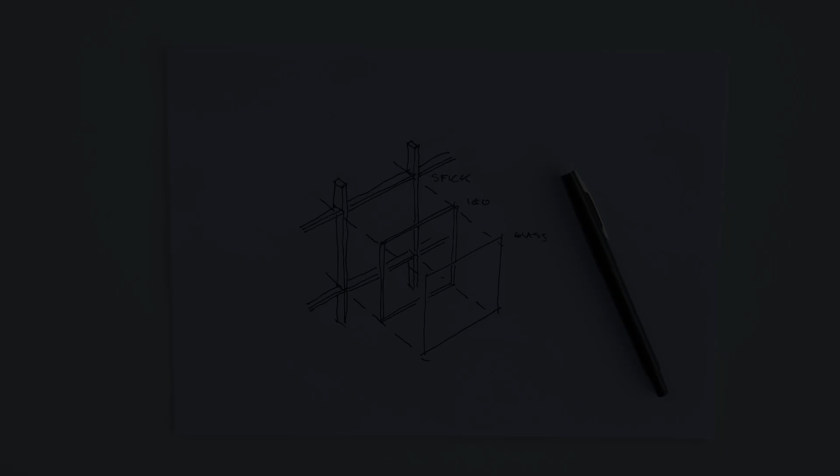Erwin, thanks for meeting. Right, as a facade designer, I did now engineer it from my side, but you're a structural designer. So as a structural designer, you have to evaluate what I did. You need to address where I did wrong and where I need to take care. And with that, I'm going to then redesign.

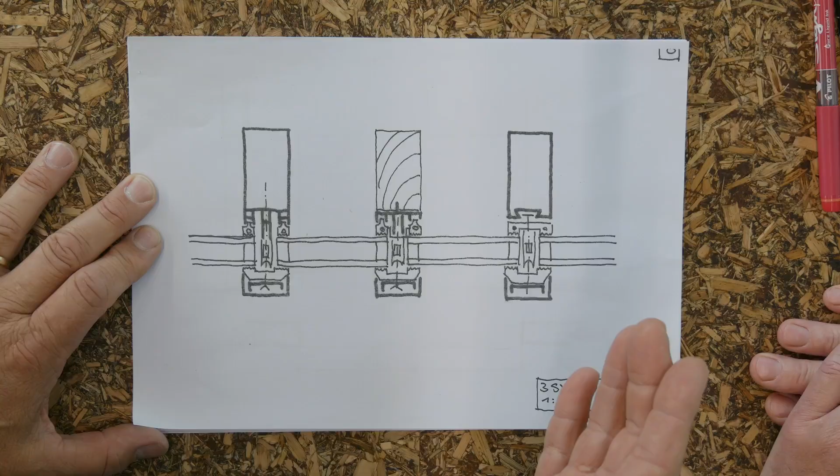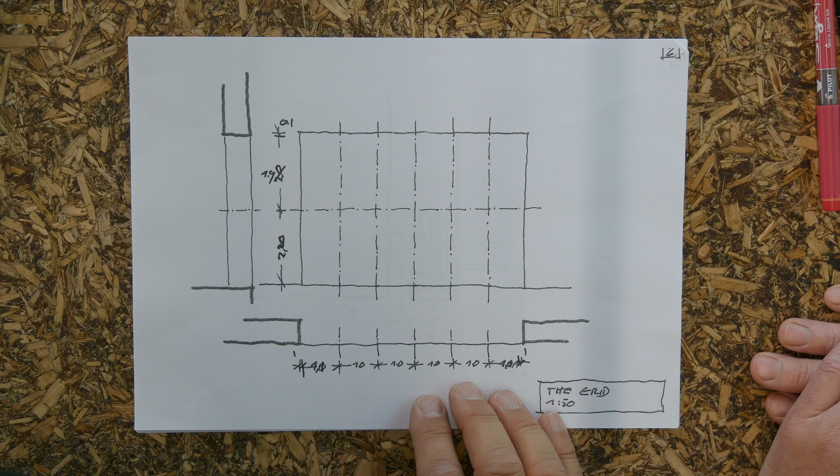The system: we made a selection of aluminium system, a wood system, a steel system, and we decided for the aluminium system. And this is the request. It's a rather simple problem. We have concrete walls, so it's good to fix. We have an opening of 620 by 420, so this is not too complex. This is the grid which was decided. We made it 220 because we want a door in here. And then, a meter something for the horizontal grid.

And then we made a decision about the system, aluminium, as said. And we need to think about the tolerances. So this is where concrete is supposed to be, somewhere in this range. And then the facade system is with a certain distance. We decided 2.5 centimeter, that's the distance from the main grid to the system. Is this kind of tolerance decision okay? Would you expect more tolerance in concrete? No, the tolerance is okay.

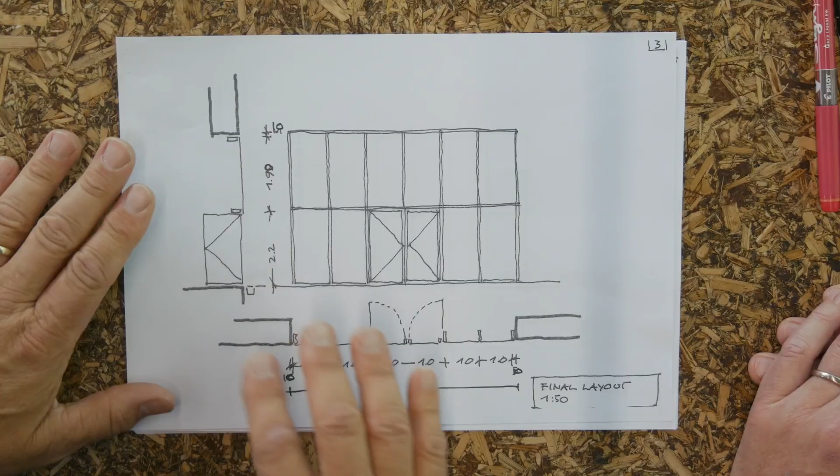I think we should have a look at how we connect or keep this mullion free from the concrete. Yeah, so expecting this is the distance, even if concrete goes very much inwards, it still has a distance. Yes. So in that respect, this is kind of okay from your side, which is good. Happy to hear. Makes less details to change for me. This is the overall final layout. So we ended up with this grid system, with this horizontal line at 220 for the door. We're going to see the door later. And now the detail.

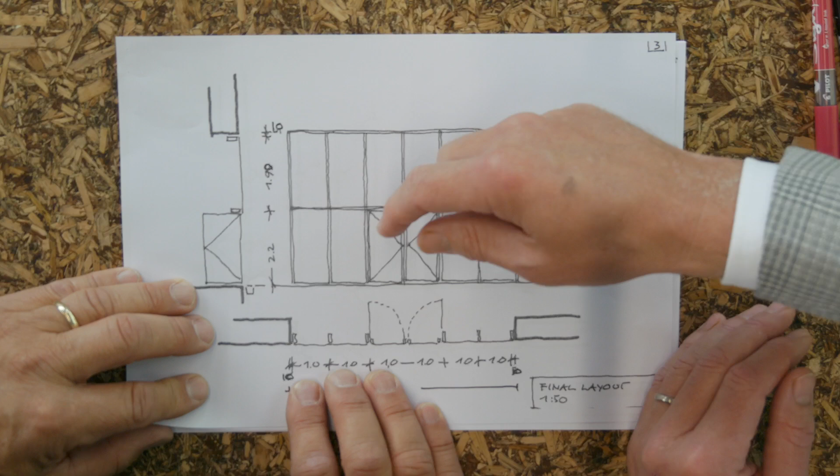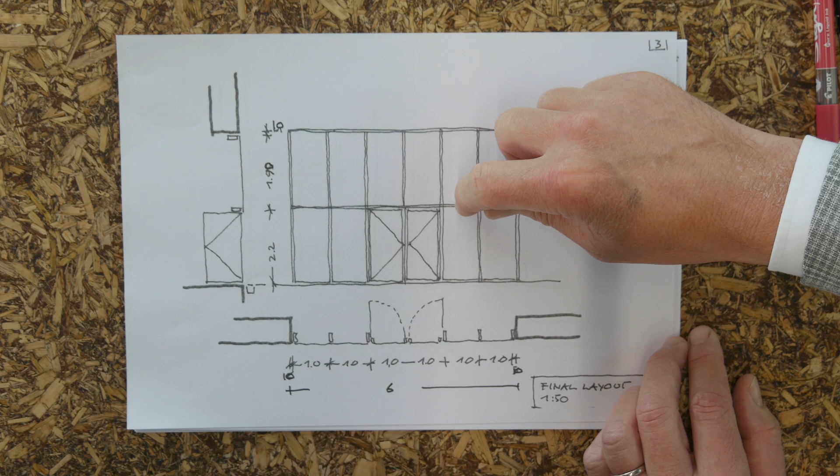These are operable doors, not sliding doors. Not sliding doors. Okay. What would you do with a sliding door? Well, that's depending on how you would organize the whole system. If you have sliding doors, maybe you could have a more heavy transom and less mullions to make sliding happen. Which means a heavier transom, taking the dead loads from the top. Yes, correct. And then allowing not having mullions here and here at these places. Correct. So that this door could horizontally slide. Yeah, and maybe you could even hang the transom to the roof. But you have operable doors, so you don't need it here. But it's always to keep in mind.

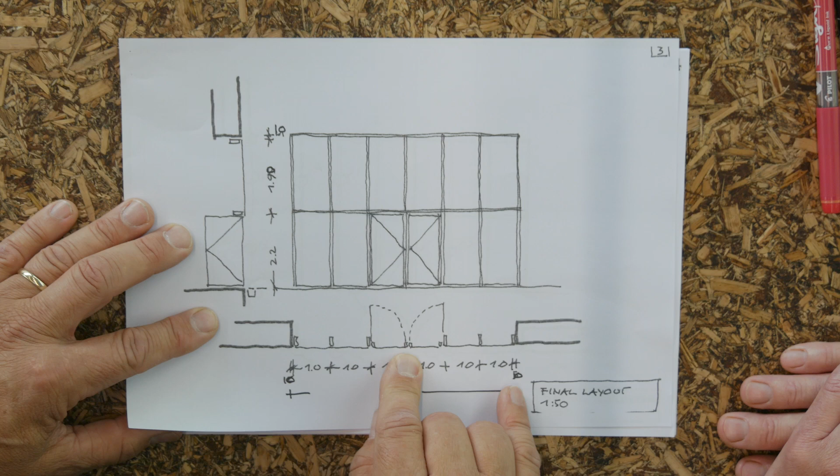I fancy this engineer because you're giving me opportunities to redesign. Very nicely done. We keep it simple. We keep normal openable doors with a normal stick system, mullions and transoms as they are designed. So in the setting, the inner one is having less, which means that the horizontal loads of this one are going to this one as well. So we need to take at least care of that load situation. I think you made a detail of that one, I hope. Yeah, you're going to see later. Okay, right.

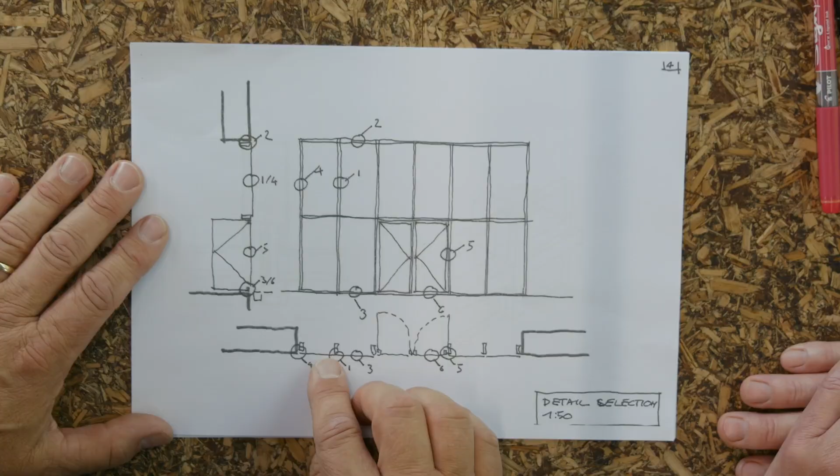So then we made a decision about the details. We decided to do the standard detail, bottom, top, side, and the door with some details. Of course, you can do a lot more of these details. Are you okay with that? I'm okay with this one, yes. As structural engineers, you always think about the mullions and transoms. So in a way, you would like to see how these two connect. Maybe we can sketch something later there. Yeah, let's see. Here we go.

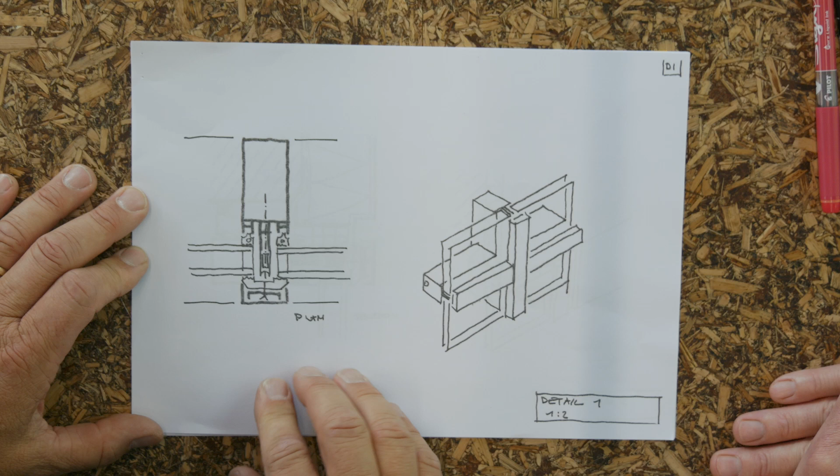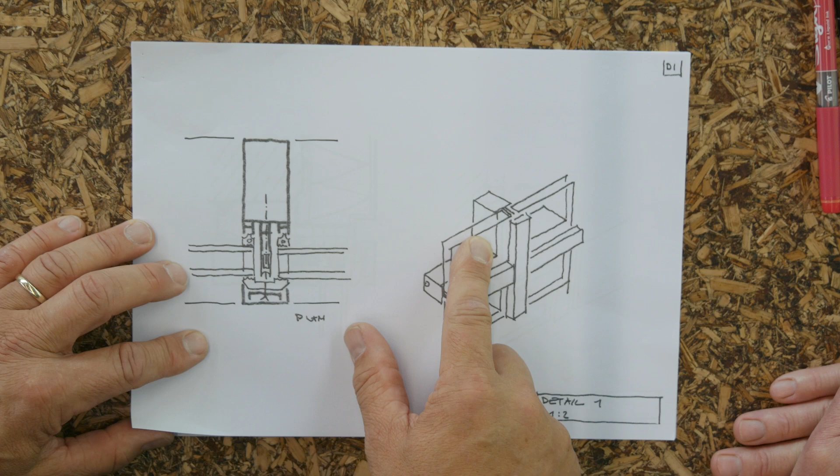This is the connection. What we did is we took it from the catalog, a typical work which you do in this situation. You start with a standard detail, the aluminium stick system, horizontal cut, and then the connection comes out of their system. So if I go for the aluminium system, they have a certain connection point, which then takes a certain quantity of loads. If I come from the timber, again. If I come from the stainless steel, again as well. And then I have to believe that somehow this load transfer can deal with the loads I'm giving to this. Do you agree? And do I have to take care of something?

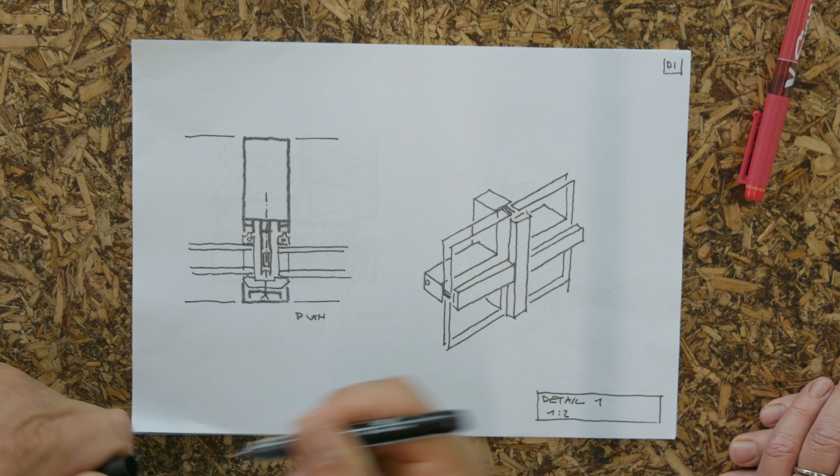Mullions are there for two reasons. The one is taking the vertical load of the whole system, and the other one is the horizontal load, which comes from wind. Yes. So it has to be strong enough and stiff enough to hold those forces. So the dimension of this needs to come from the catalog, I guess.

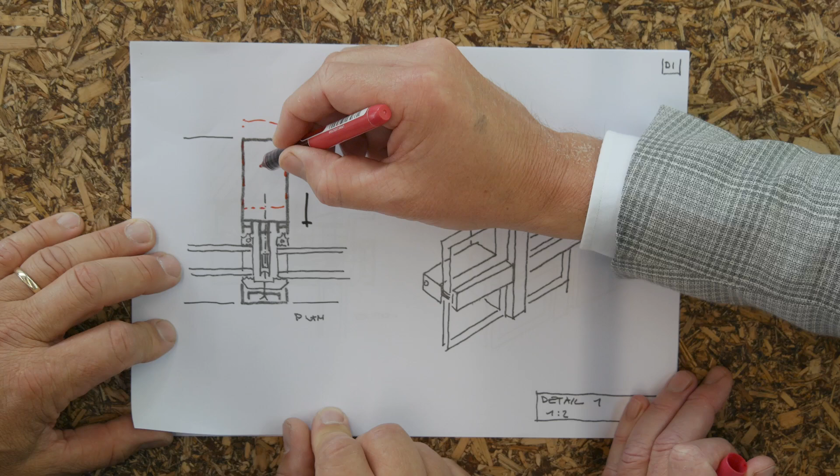Yes, because it can deform. By wind, it might deform in this way. Yeah. And if it goes too far, you feel uncomfortable, unsafe. Yeah. So it should be stiff. And the other one is you have vertical load. So there's a vertical load coming down. Which means this way. Yes.

And this way. Correct. And first of all, the vertical load only comes from the weight of the glass and the system itself. So how does the load of the glass find its way into the transom and mullion? That's a good question. Maybe we can go back to one of the previous. Yes, I think I like this one.

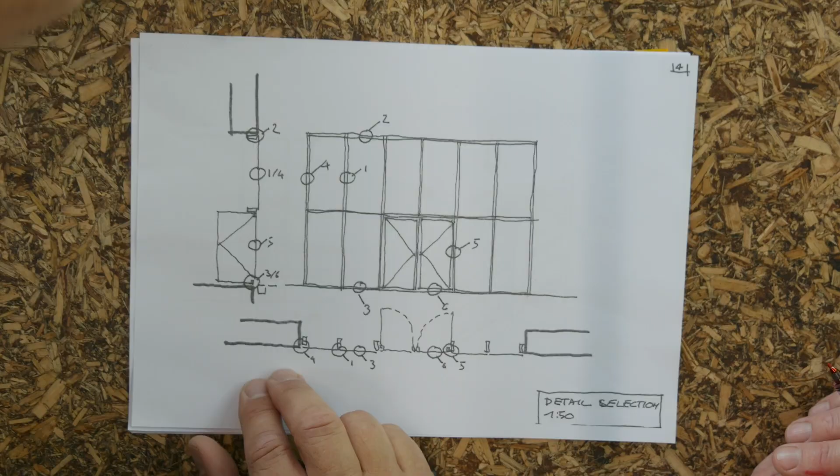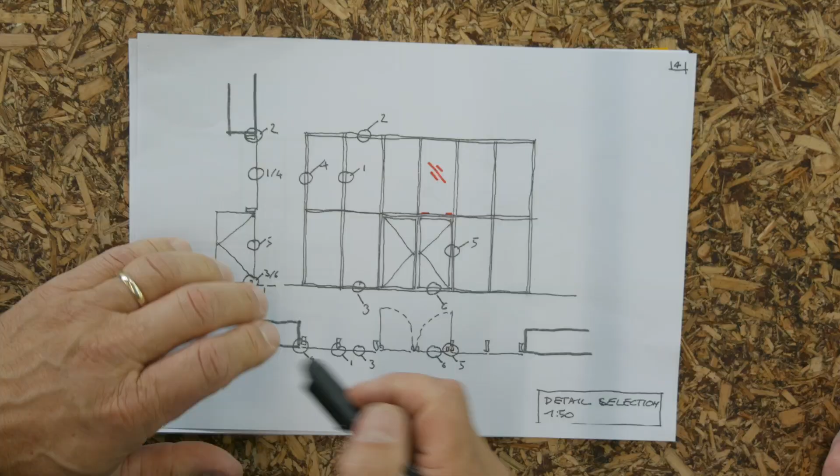Okay, go on. If you would have, let's say, this panel here, it's a glass panel, and what we usually do is to have two plastic blocks, approximately 10 centimeters from the vertical edges. There it rests on the transoms. I see. And then the transoms transfer it to the mullions. So the load path, the first one is, it's going to rest on the transom, and from there on, it goes further and it will rest on the mullions. That is how a vertical load of a glass panel goes down to the foundation.

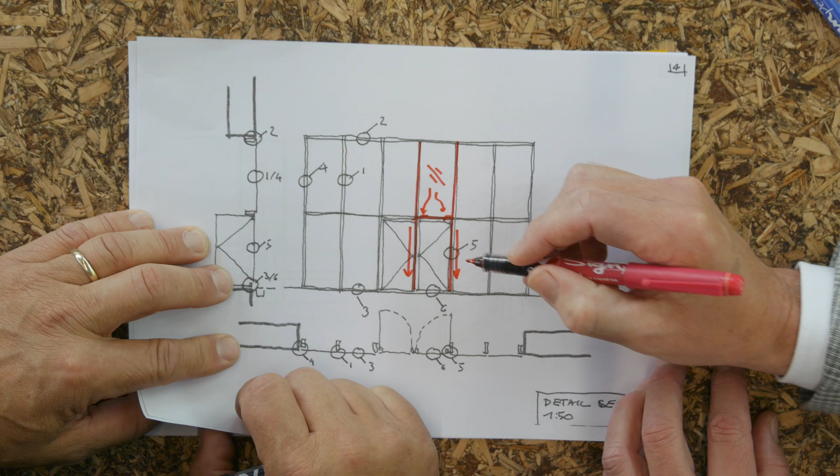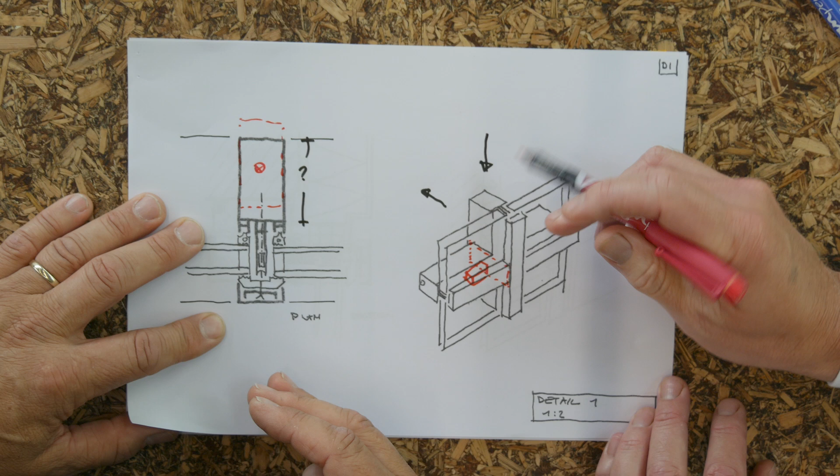Great. Which means in this detail, we somehow have to have something here. Yes, you have to get some plastic blocks there, which we're going to see in the vertical section in a minute. And of course make a good connection where this transom connects to this vertical mullion. So those are two very important structural points. Go down here, then they're transported sideways, and then they go down.

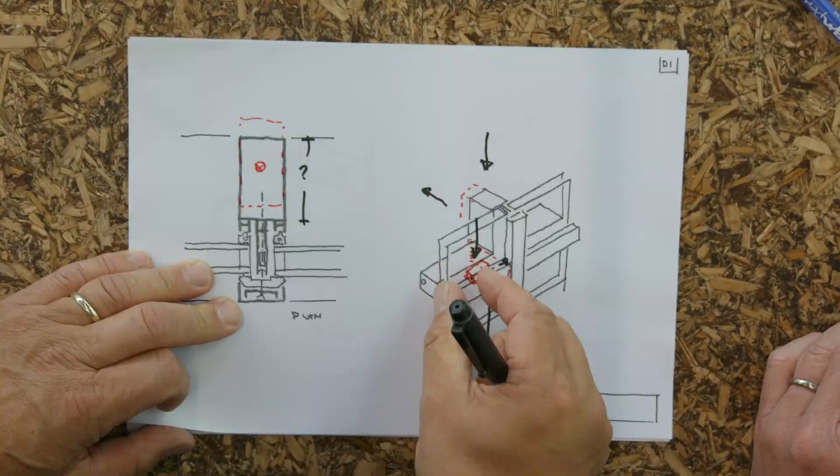Correct. That's the vertical one, and additionally, you also have to see, if you have this horizontal load, that it doesn't deform too much. Yeah. And I think we'll get there when we have the detail of the tolerances where we hit the concrete wall. And again, I'm going to take this as a given system, so I'm going to check the system provider's information to see how wide I can go with what kind of dimension and how deep I need to go for what kind of dimension of this.

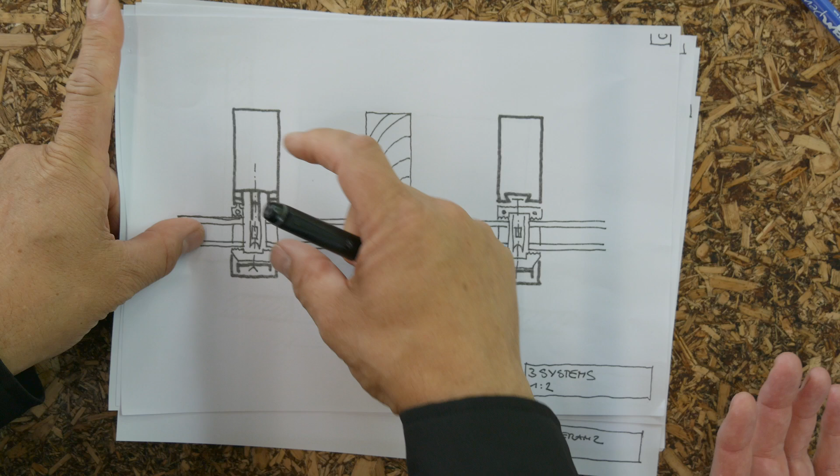Yes, and we see here the aluminum system, and of course you also have wood and steel, and it has to do with elasticity. So the different materials have different elasticities, which gives different dimensions. Bluntly speaking, the aluminium one is a lot wider because it's weaker as material versus the steel system. It's a factor of 3 in stiffness. Or the other way, I can go higher with a steel system with the same dimension. Yes. As I say, principal rule of thumb.

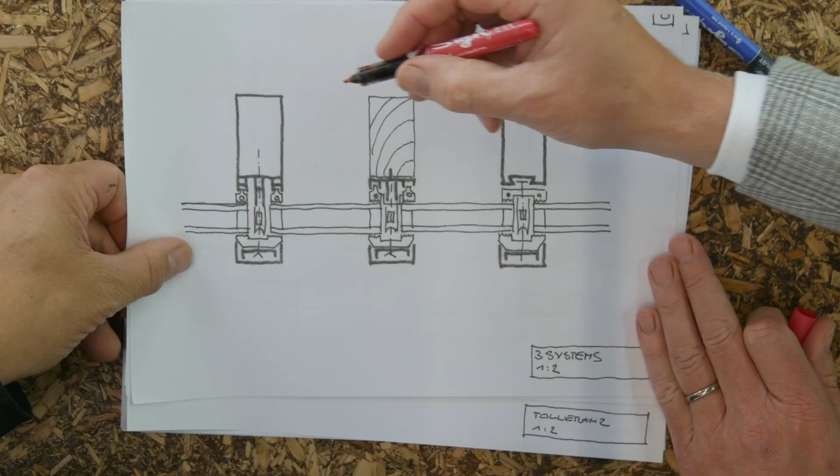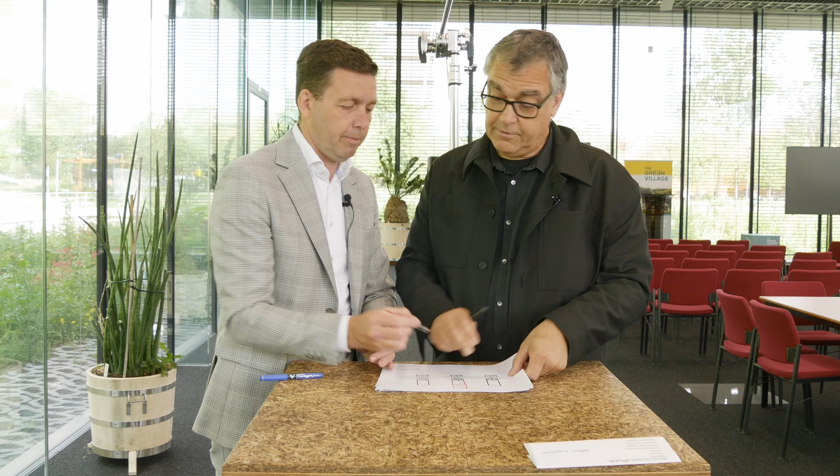So if you would simplify, you would expect that this one has the least dimension. This one will be slightly larger, and a wooden one would you expect to be larger? That's my first expectation. For the same height for the structure. Okay, that's a good one. So going back to this one. This is the main detail.

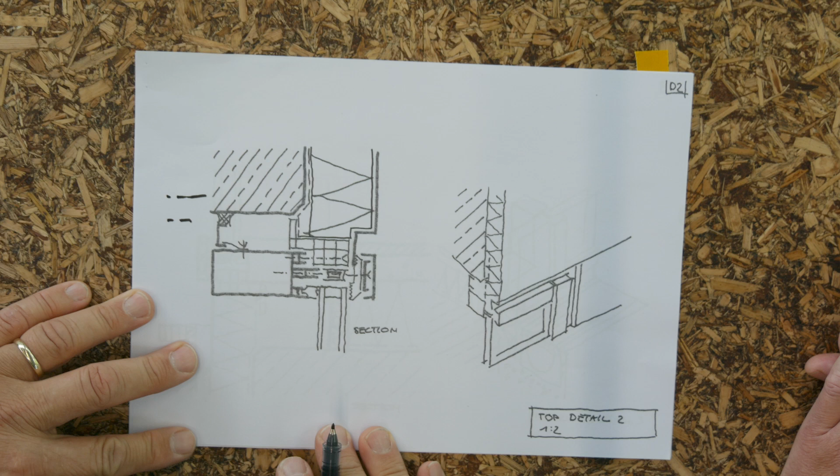This is now a connection to the top. And here we again talk about the tolerances. We had this integrated, so we said this is 1 centimeter, 1 centimeter, where the concrete could find its position. In the final situation, we still deal with the same aluminium piece. And we need to get this airtight, watertight to the outside as a normal facade system. Any aspects from structural design which we have to take care of?

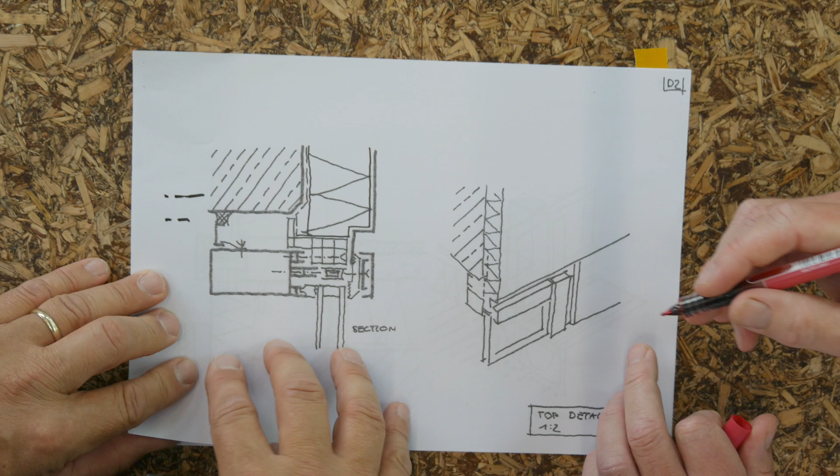Yes, I will ask you a question. How much vertical weight is here at this top from this facade system? From the system, there's no weight. Yes. So what do we have to solve then? Do I have to solve something in this direction? No. Do I have to solve something in this direction? Yes, correct. Here you only have horizontal wind load.

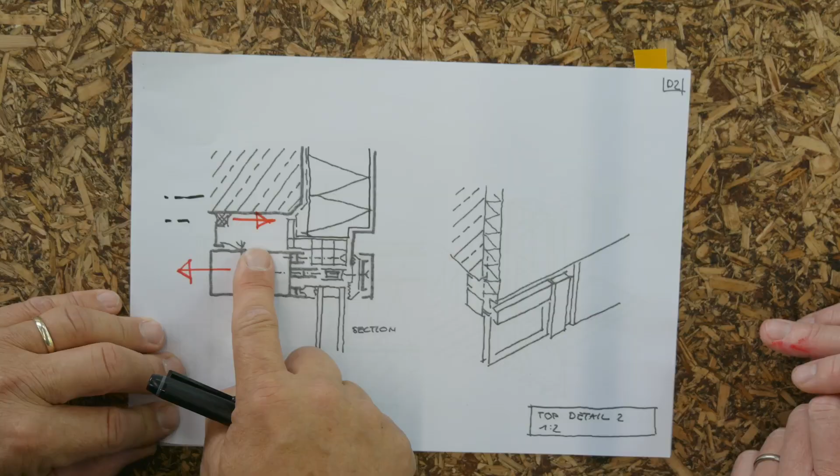And of course, the system itself weighs a bit, but that's not a big issue. So here you have to solve the horizontal force, and you have to connect that to this counterpart, which is the concrete. Yes. Okay, these two have to be connected. Yes. Again, the catalog will supply me systems, so there's some kind of connection detail which is to be integrated here. And if I would finish this detail, you could also draw the mullions here.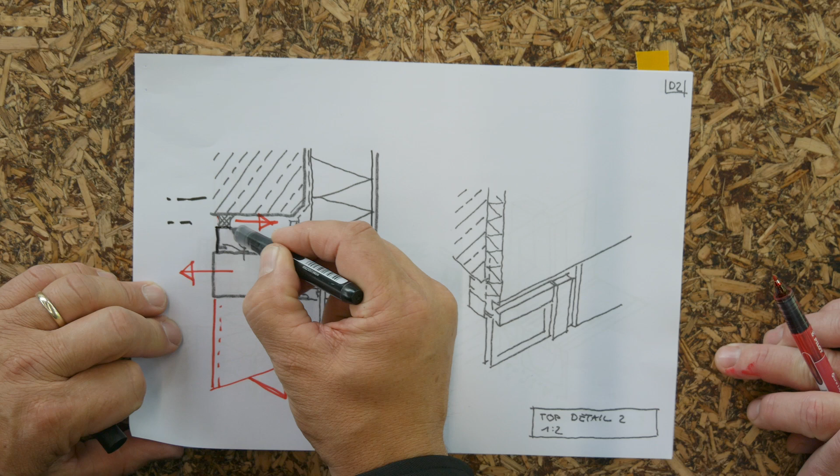So there are always mullions. So you could also maybe connect the mullions a bit further here. So it's a good idea to connect. So it may end up in, say, the mullion going on this way, and then there's a shoe with a sliding piece inside, for instance, allowing that this movement of the main structure doesn't hit the system itself, but allowing that horizontal forces are taken.

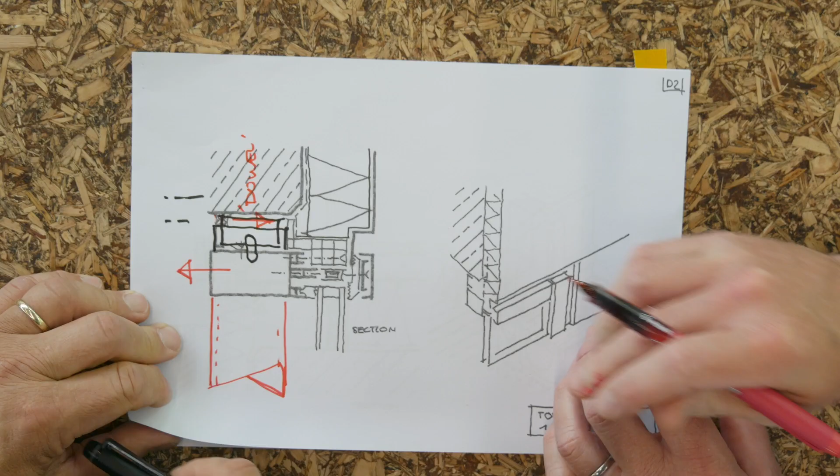It's like a dowel. And then there's maybe some kind of connection in here. Yes. Let's call it a dowel. A dowel. Yeah. Great. Top. Bottom. Yes. When I rephrase your question about the loads, I have the horizontal loads. Correct. And I have the vertical loads. Yes. So somehow these loads need to be taken and these loads need to be taken. Yes. What is your answer?

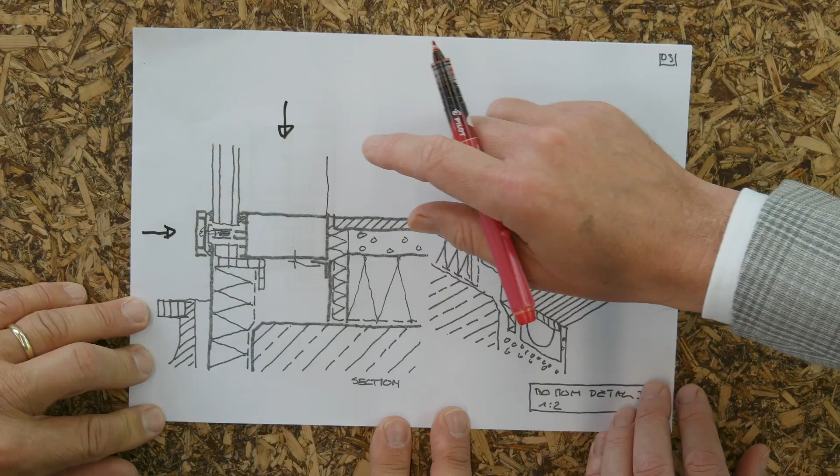My answer is you could do. I always think in options. Do not always give one solution, but try to have more options. One of the options could be if I have again the mullion where all the forces are in. Okay. You might have a support in this area. For instance, a block of insulation which is strong enough to hold the forces. So a solid block of foam taking the whole structure.

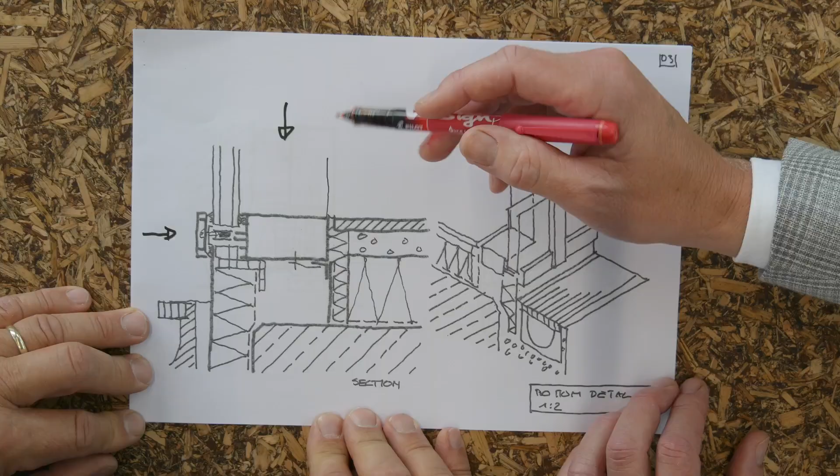Yeah, why not? Okay. No point load problem. Which actually would also fill this part, which then would improve my U value. Yeah, and you have no bugs. And I have no bugs. True. Yes. The other way could be to only support the vertical mullion. For instance, all the loads come down and I might even support it here. So all the forces go down here. And I have a kind of pedestal, a kind of footing,

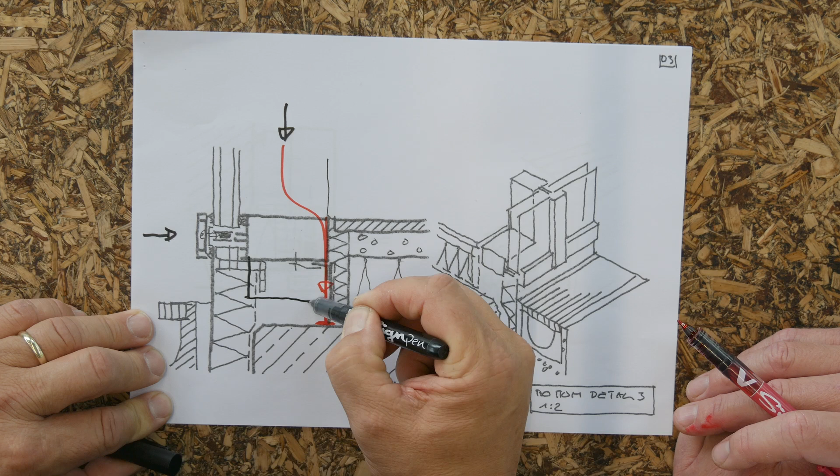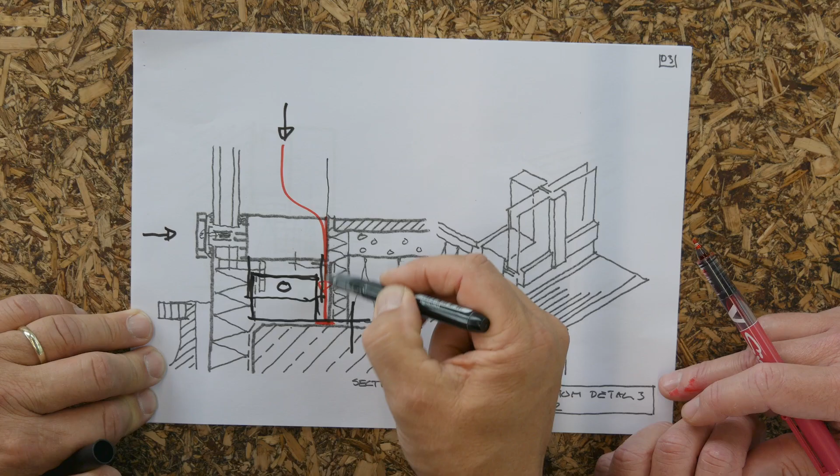where it could rest. Can I do the same as I did at the top, where I have the mullion being longer and then some kind of dowel-like situation which I fix? That is also a good idea. And then I fix it here, and then I have a structure which is fixed to the side. I can actually move it before I fix it. And then I extend the facade system and fix it with a final screw in position.

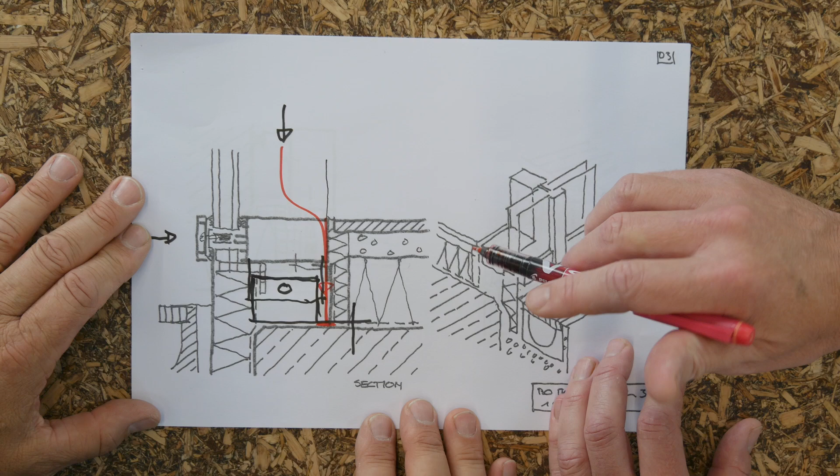Yeah. And then the difference is that this is fixed, so forces down, while this is still allowing that the main structure moves and doesn't give the force to the system. And one way of moving that we didn't address yet is rotation. Since from the horizontal wind load it will try to bend. True. This will give a certain rotation. Well, hopefully not that much. I'm just exaggerating to make it clear.

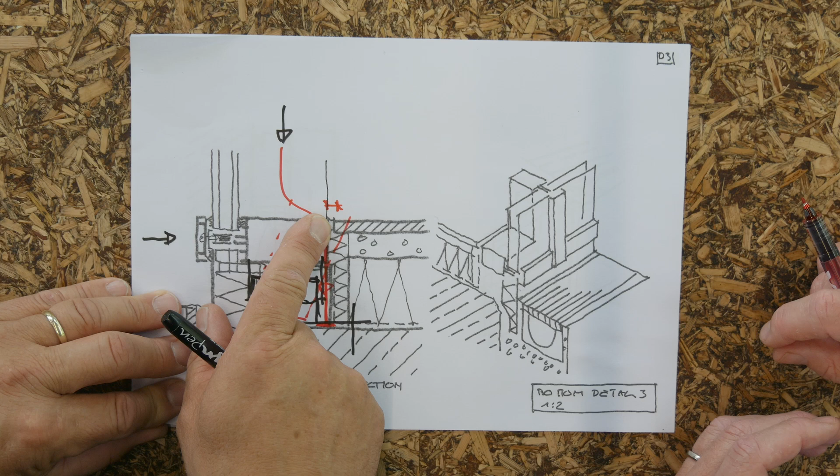Yeah. So at this position, you need a kind of soft material that knows how to. Which I did. That's fair. You did. So it's very important to keep a certain distance there. There's potential for rotation of the mullion. Did you do the same at the top? Of course you did. I already checked that. I saw that. Thank you. Okay. Well done.

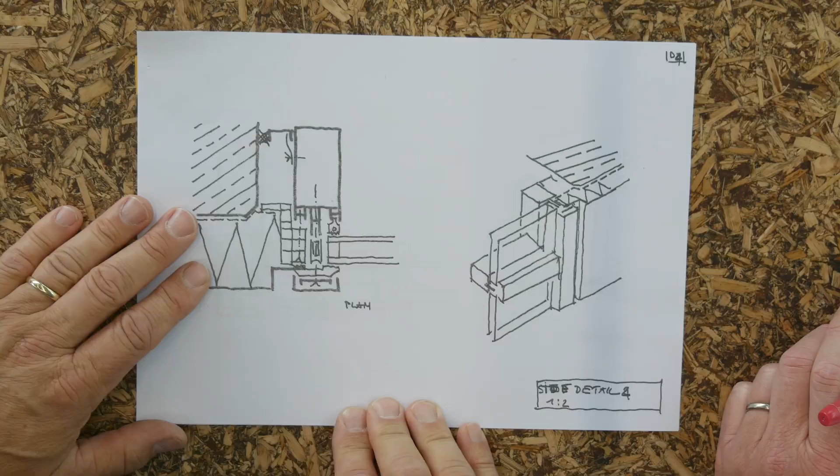Okay, this is done. Now side. Rephrasing your question, what kind of forces? We do have forces here. We don't have forces in this direction. So only this kind of forces. As it is now taken at the top and the bottom, do I need to fix it here? Yes, I would like to. Not from a structural engineering point of view, but more for weather tightness.

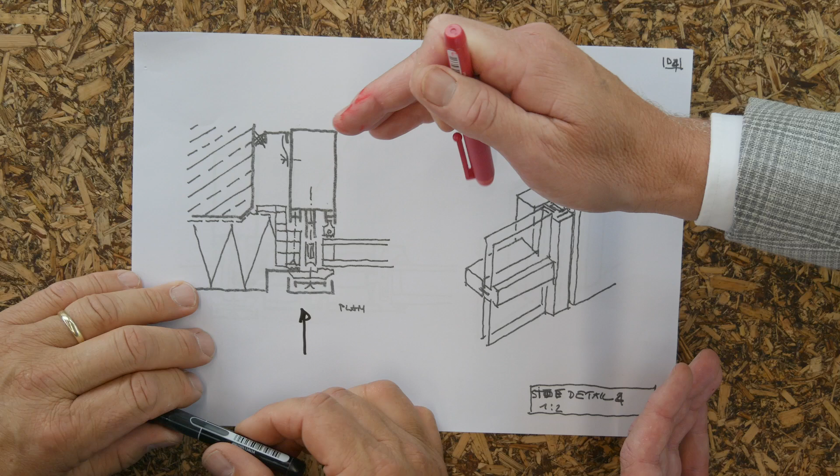I see. If this one starts to move a lot, you can imagine that it's very hard to keep this detail watertight. Okay. And you would also like to keep the dimension the same for each mullion. So to keep that the same, you would have a connection to the concrete here. That's very important. So I'm somehow going to do a connection like this, and I still need to work with tolerances.

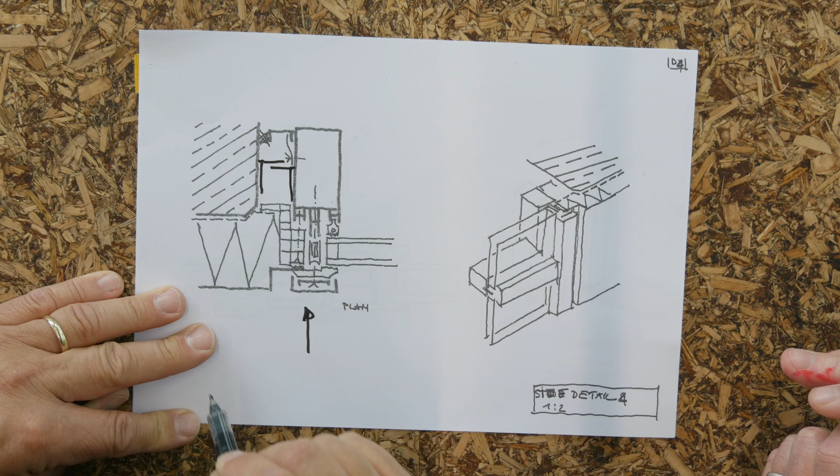Yes. So I allow this to be fixed finally in the end. Yeah, and so you have here, it's slotted like here, so it can move a little, but this one is really fixed here and will be fixed there. Okay. And that way, the horizontal forces that come here can be taken to there.

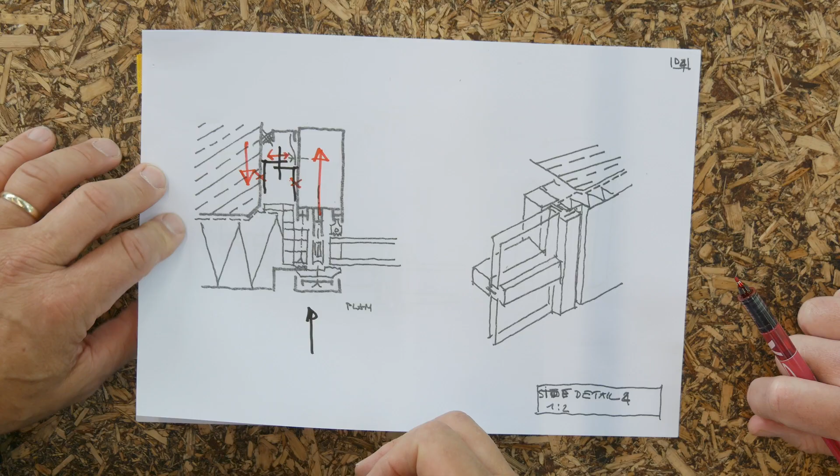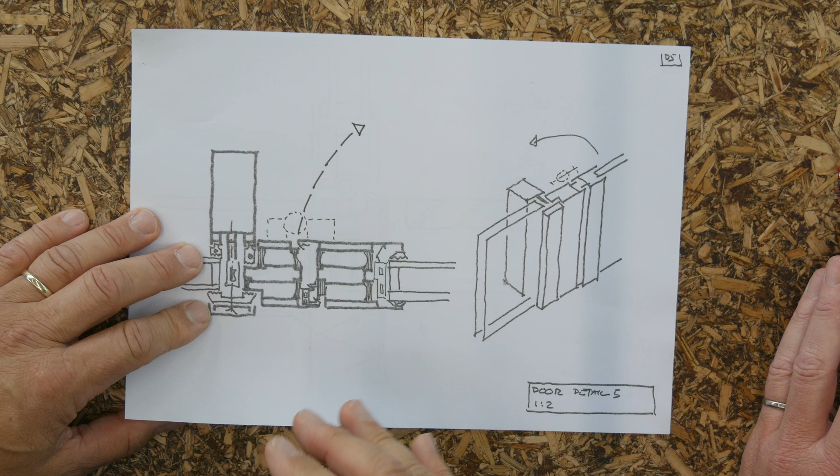Check. The door. Yes. Well, this pretty much comes from the system. So the system supplier provided a certain detail how the door is brought in. Anything I have to take care of here, I sketched where the hinge would, for example, be. This is quite heavy. So when I think about the whole geometry, this door is what, 200 kilo, 300 kilo? And me even hanging on makes it another 100 extra. So the hinges need to take a lot of force.

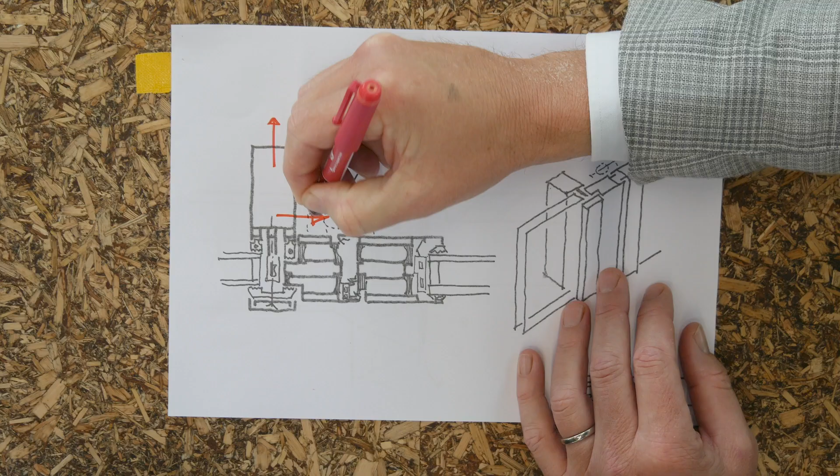When I think about the hinges, I imagine this goes horizontal, but then in the other direction. I mean, we had the wind load, which was in this direction. But if you had the hinges, I think you all know it from your own kitchen, the doors always start to hang. So there will be a horizontal load here. So it needs a very good connection there.

And when we draw it in here, what does it mean? It means that if I would sketch the hinges, I would expect hinges there and there. And the whole weight of the door is in the middle. So what it tends to do is give a horizontal force in that way and one in that way. So you have to fix it very well to the mullion.

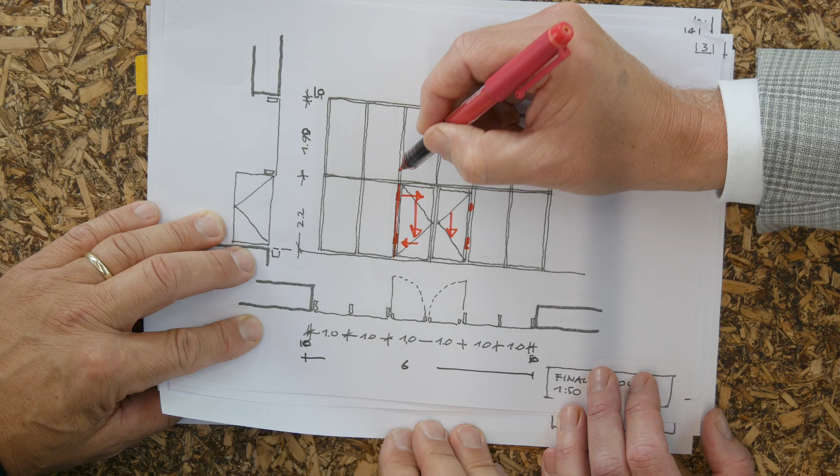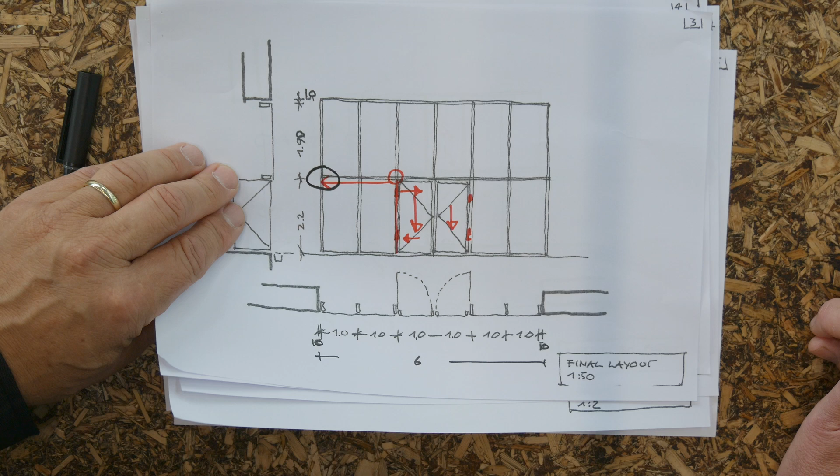See. And what it needs is this horizontal force. I have to get that one back in this direction. So connecting the mullion to the transom is very important at the door section. And that means that this detail at this situation also gets forces. Aha, this is interesting. So in this respect, it's not only about this direction, it also starts to become an aspect for this kind of direction. Be aware.

Side note, for the experts, we're not taking anything into the glass. So the glass doesn't take any of the loads in this system. I would love to, but... That's why we're here, because everything is in the glass. No, not here. Not in this course. Maybe somewhere else, but not in this course.

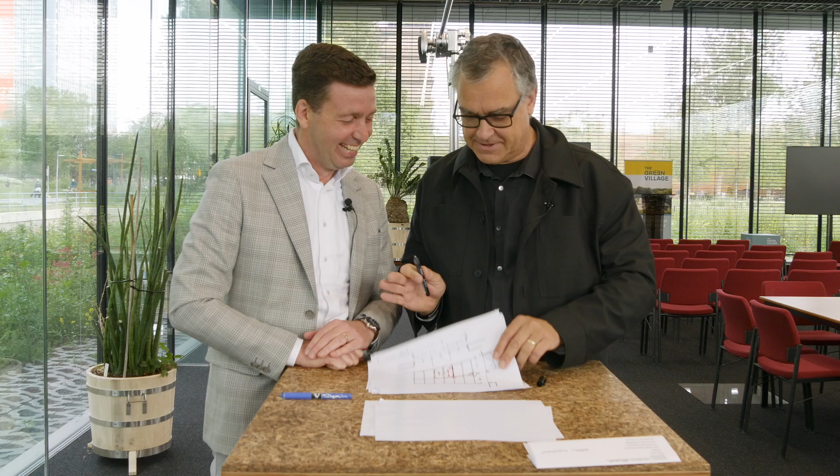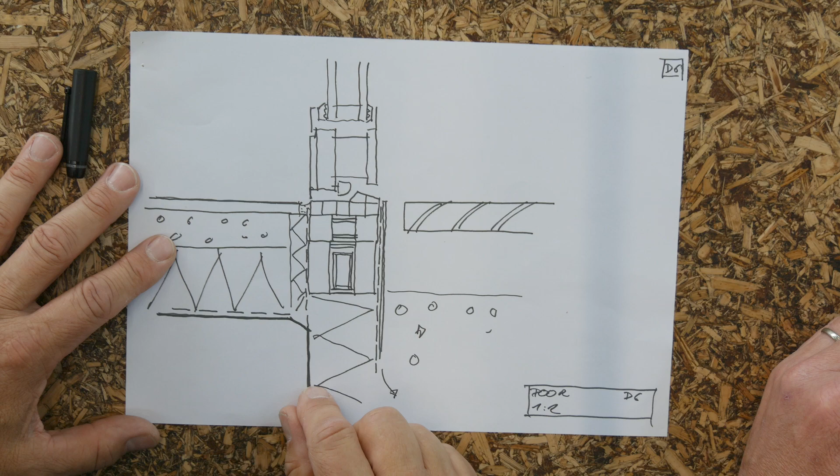Okay, so we talked about the door detail. Again, I rely on the system supplier. So I take the material the system supplier delivers, and then I'm done. And then there's the final one, the bottom one, which I think is not that important for you, because we have a typical detail of the system supplier for the door, which mainly is about water tightness and air tightness. And of course, I always would like to see them as a structural engineer, because then I know that I'm complete.

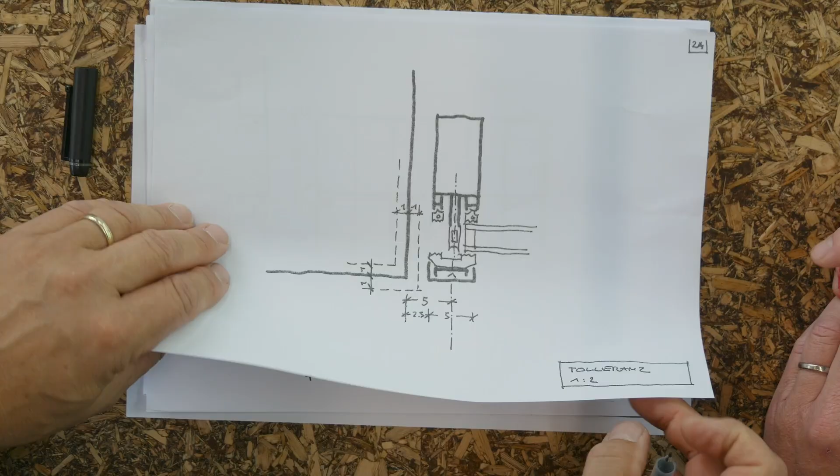Let's take a look at the brief. Dead load we talked, payload, impact, horizontal and vertical load transport, movement of the building, movement of the facade. Did we talk about movement of the building? No. Okay, well, we took care of it in the details. If the building moves, it's not allowed to deliver any forces to the facade. So the detail we drew at the top part allows the building to move while the facade stays solid. So no impact to the facade.

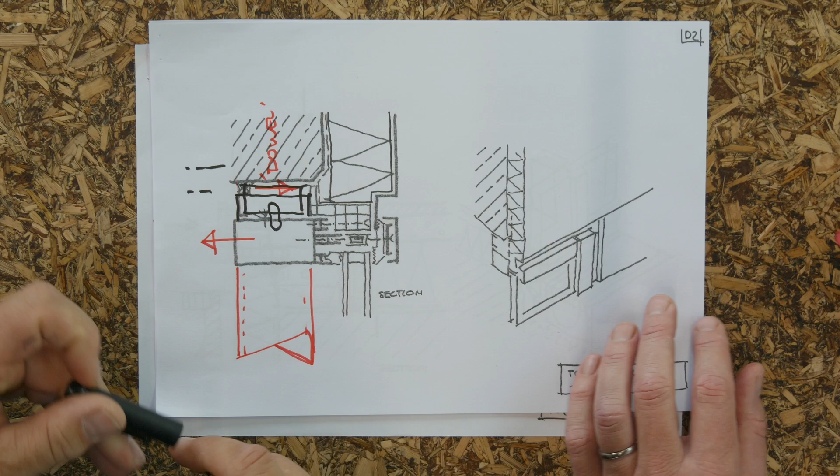Which is one of the most important aspects of facade engineering. The facade is standing on itself and not taking the loads of the building. That would be the ideal. And I think you did a great job here, because you have insulation here. A building can move by a difference in temperature, and since the insulation is on the outside, the difference in temperature will be very small. So the building will not move a lot.

Got it. Okay. Erwin, we're done. Thanks. Well done. This was perfect. Thank you. You're a good engineer.